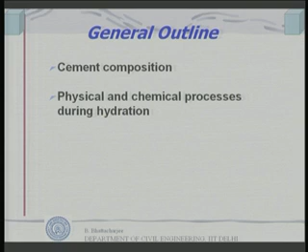The general outline of today's talk would be: first we will look into general cement composition, then the physical and chemical processes involved in hydration, then what is known as setting, and then the structure of hydrated cement.

Let us look at cement composition. We mentioned earlier that cement is produced by burning calcium carbonate found in limestone or chalk, and silica, alumina and iron oxide found in clay or shale at about 1400 degrees centigrade. So we burn limestone with clay. This material sinters and partially fuses to form what is known as clinker. Clinker is cooled and ground to a fine powder, a little gypsum is added in the process, and this results in what is known as ordinary Portland cement, OPC in short.

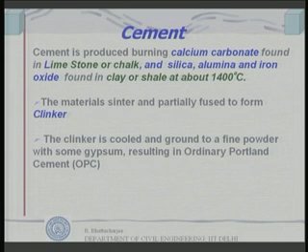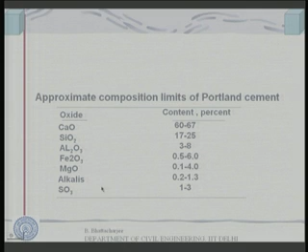Just for information, India is the second largest producer of cement after China at the moment. Now we can look into the oxide composition of the cement.

We burn limestone, and limestone is calcium carbonate. So when you burn limestone, the carbon dioxide is liberated, leaving calcium oxide. The clay or shale leaves silicon oxides, iron oxide, and aluminum oxides. So various oxides are left after burning and they form into solid solutions. Therefore cement is basically composed of various inorganic oxides.

Approximate composition limits of cement: calcium oxide in ordinary Portland cement is generally 60 to 67%, SiO2 around 17 to 25%, aluminum oxide 3 to 8%, and iron oxide 0.5 to 6%. Magnesium oxide is restricted to 0.1 to 4%. There will be sodium oxide and potassium oxide, the alkalis, at 0.2 to about 1.3%, and sulfur trioxide 1 to 3%. There is also something called loss on ignition, which is a measure of unburnt material that can burn and form into oxides. So this is the typical oxide composition in cement.

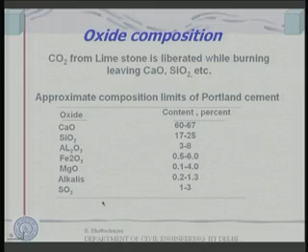One point before we go to the compound composition of cement: burning cement essentially generates carbon dioxide. So from an environmental concern, cement production generates carbon dioxide and consumes a lot of fossil fuel. There are two ways it generates carbon dioxide: first, the calcium carbonate in limestone generates carbon dioxide; second, since we burn fossil fuel to heat up to 1400 degrees centigrade, we further generate carbon dioxide. So from an environmental point of view, cement is not really a green material. Therefore cement should be used very judiciously. It is a material that gives us artificial stone, but it should be consumed as optimally as possible, to the least amount, because it generates so much carbon dioxide.

Now let us look at the compound composition. These oxides form into solid solutions, and these solid solution compounds are: tricalcium oxide with SiO2, called tricalcium silicate; dicalcium silicate; tricalcium aluminate; and tetracalcium aluminoferrite. So these are the main compounds of cement.

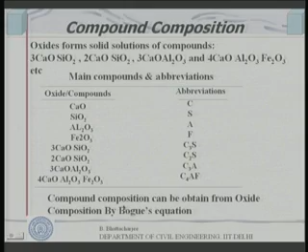This compound composition can be determined from oxide compositions using a formula known as the Bogue formula, or Bogue equation. So if you know the oxide composition, you can find out the composition of C3S, how much C2S, how much C3A, and how much C4AF. To remember these long names again: tricalcium silicate, dicalcium silicate, tricalcium aluminate, and tetracalcium aluminoferrite.

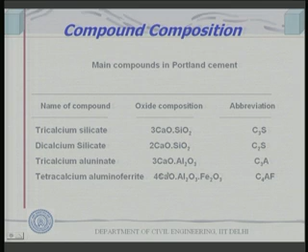This has been repeated so that it is clearly remembered, because that is the terminology one uses again and again in the context of concrete and cement.

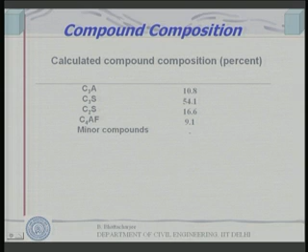Now, if I calculate the compound composition based on the Bogue's formula that we mentioned, we find that C3A comes out to be about 10.8%, C3S comes out to be 54.1, C2S comes out to be 16.6, and C4AF comes out to be 9.1%, assuming calcium oxide for OPC is 60 to 67%, which was shown earlier in one of those slides. So roughly, C3S is 54%, which is the maximum, C2S is about 17%, C4AF is 9%, and C3A is 11%. So one can calculate the oxide composition, and from the oxide composition one can calculate the compound composition.

Now, this reaction is exothermic, it generates heat, because as I mentioned earlier, you are actually producing cement. Cement is not a naturally made material, we are producing it at the expense of energy. We consume a lot of energy because we burn it up to about 1400 degrees centigrade, and therefore we lock up a lot of energy. This energy can dissipate by reacting with water. Chemical potential is raised, and this chemical potential comes back to a relatively stable state by reacting with water.

So the reaction is exothermic, it produces heat. If we see the relative heat produced by different compounds, C3S produces about 502 joules per gram. This should be joules per gram, not calorie per gram. C2S produces 260, C3A produces 867, and C4AF produces 419.

So this is the relative heat of hydration. C3A produces the maximum heat of hydration, generating maximum heat on reaction, whereas C2S generates the least, with others in between. We can presumably understand that C3A will react faster than anyone else, while C2S will react at a slower rate because it generates less energy. It's not an explosion that generates a lot of energy instantaneously; where heat of hydration is slow, the reaction is relatively slow too. So C3A reacts immediately, maybe the next to react is C4AF or C3S, and lastly C2S reacts. This takes a long time for the C2S reaction to be complete.

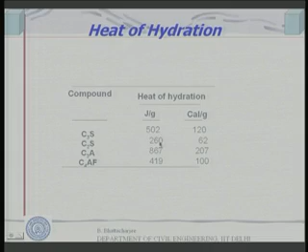So this is the heat of hydration of pure compounds.

If we do a schematic representation of the formation and hydration of Portland cement, this is what we should see. First, element-wise, we have oxygen, silicon, calcium, aluminum and iron as component elements. These combine to form oxides like calcium oxide, silicon oxide, aluminum oxide, and iron oxide, which is ferric oxide. Then these combine to form compounds: C3S, C2S, C3A and C4AF.

And when you add water to this, it forms what is known as CSH gel and lime, calcium hydroxide, slaked lime. We shall see this in more detail.

Now, these combinations can differ in different types of cements. The proportions of these compounds would vary, and by varying these proportions we can actually get different types of cements. We will discuss this in detail, because I can control the proportions of oxides. The oxide composition of the cement can be controlled relatively, from the raw material mixing etc., and thereby the compound composition of the cement can be controlled. We know the properties of each compound, like C3A possibly reacting before anything else because it has the highest heat of hydration. So if I want to increase or reduce the rate of heat of hydration, I will have to reduce the C3A component in the cement.

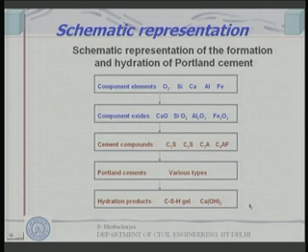So by manipulating the compound composition, I can get various types of cement, and I can add some additives too. So Portland cement plus various additives gives me various types of cement, and when added with water, it gives hydration products. One of the major compounds is calcium silicate hydrate gel, CSH gel, and it also produces lime to a certain extent. We shall see this in detail in the next few slides. So let us see what happens to cement when I add water.

Physically, what happens when we add water to cement? The mix will be in a plastic state - not liquid, not solid. A solid has a definite shape, a liquid flows on its own and attains the shape of the container. A plastic does not attain the shape of the container on its own, but you can make it do so by applying force, causing it to move or change shape. So when you add water to a powder like cement, it forms a plastic mix, and a uniform mix would be plastic. So addition of water makes it plastic and a workable paste, as we call it.

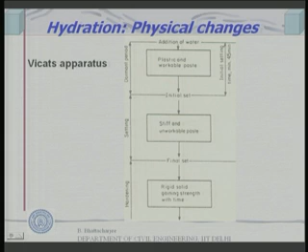This paste, because of the reaction taking place, tends to solidify - after all, the reaction consumes the water. This solidification process we call setting, so it sets to become a solid. The initial period we call the dormant period, when it goes from plastic state to solid state, and this should be a minimum of 45 minutes for ordinary Portland cement, as specified by most codes. So we call it initial setting - meaning from the plastic state it goes to a reasonably solid form, after which you can't deform it further without compromising properties like strength. If you try to give it a new shape after this time, there will be some loss of its properties.

So you add water, the mix is plastic and workable, you can apply force and get it into the right kind of shape, and then it initially sets. This time should be a minimum of 45 minutes, and we call this the dormant period.

Now, how do we measure this? The basic ideas of physics and chemistry were not available in earlier days when this was started, so a specific apparatus was designed called the Vicat apparatus, which has a mold where you prepare a standard paste. The standard paste is prepared with a standard amount of water, which we call standard consistency - again determined by the same apparatus, whereby you prepare a paste and allow a needle, a 10 millimeter diameter needle, to penetrate through it. When the penetration reaches a specific level, we say it has standard consistency.

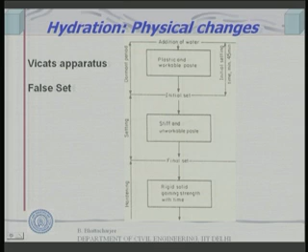At the moment, I'd like to mention something called false set and flash set. False set happens when you have added too much gypsum into the system - if the gypsum quickly reacts with water forming a solid, as if it has solidified, that is called false set. You can remix it again and get the right kind of setting.

So that is the dormant period and initial set, but after that it actually solidifies further, taking about 10 hours maximum, by which it should become fully solid - but it still does not gain strength, it is not hard enough. If you try to pull or push it, it would actually break. So after setting comes hardening. Hardening means gaining strength, while setting means going from a plastic state to a solid state. In initial setting, it is in a dormant period, and then it becomes stiffened and a non-workable paste - you can't work on it after the initial set. It sets further, becomes fully solid, such that if you open up the side mold, it will not collapse.

It has got its definite shape, and if you expose its side faces of the concrete or cement paste, it will no longer collapse. So it has become stiff enough. That is called final setting, and beyond that it becomes a rigid solid, it goes on gaining strength, and that process we call hardening.

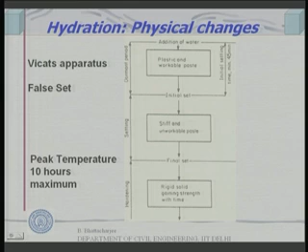Final set also corresponds to the time at which peak temperature is attained, because heat of hydration is produced simultaneously, and peak temperature is attained during that period of time. So that is what is initial and final setting time.

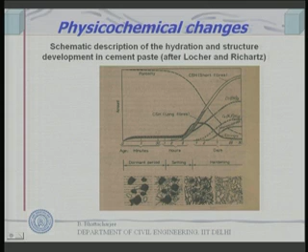The first product to form, because C3A is the most reactive of all the materials, will react quickly with water unless it is controlled, and it will give you an impression of what is called flash set. That means C3A reacts and stops, inhibiting the reaction of all other material - that is called flash set.

So in order to control this setting process, we add some amount of gypsum. Gypsum is calcium sulphate, and this calcium sulphate has high affinity for C3A, tricalcium aluminate. Tricalcium aluminate and gypsum react, forming calcium sulfoaluminates. The name of this compound is called ettringite.

So that is the first thing that forms during the dormant period, and you can see the dormant period here. The cement particles are as if floated in water, and during the dormant period some reaction takes place and a sort of fiber-like growth takes place.

This is the phase where setting is taking place, and these fibers grow. The solids - the water filled spaces here, outside the solid - tend to become filled in with fiber-like materials, and this water reacts. So the volume occupied by water now gets filled in by solids, and gradually more and more solids are formed.

In the very long run you will have a structure like this, which will have a large amount of solids with some pores which were originally occupied by water, and some other special pores - we will come to this in detail. So this is how the physical changes take place.

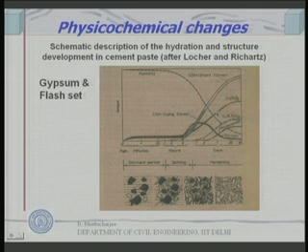And you can see the porosity goes on reducing, because the original pore space was water-filled space, so there were fewer solids and therefore a lot of interstitial pores between the cement particles. This decreases because the water-filled space is now occupied by solid products of hydration. So this increases while the pore space reduces.

So we can go to the next slide to look into the reaction process. The main chemical reaction, C3S reacts with water. In cement chemistry, we abbreviate water as H. Calcium hydroxide therefore is abbreviated as calcium oxide and H2O, that is CH. So CH stands for calcium hydroxide.

So when C3S, this is one of the major reactions, C3S reacts with water, it forms CSH gel, which is a gelatinous structure, the fibers that we have seen, and some amount of lime is produced.

In fact, 100 grams of C3S reacts with approximately 23 or 24 grams of water, forming about 75 grams of CSH gel, calcium silicate hydrate, and 49 grams of calcium hydroxide, slaked lime, which is the same compound, same composition as slaked lime. So the lime is formed.

If you see the C2S reaction, C2S reacts with a similar amount, although not exactly the same, we shall discuss this again. 100 grams reacts with 21 grams, producing less amount of lime, but both produce CSH gel, whereas tricalcium aluminate does not produce the same CSH gel, but produces calcium aluminate hydrates. It has got different stages, initially C4AH is one product, there are other products formed. Anyway, we need not look into those details, but that is the main reaction of cement with water and its products.

If we look at it, the strength giving compounds are shown here, this is age in days, and this is compressive strength given in megapascal. C3S shows very high early strength; in the initial ages C3S reacts and it has got CSH gel which has got the bonding property. Basically, when cement reacts with water, it forms this gelatinous structure which has got enormous surface area.

Very large surface area, possibly 1000 times more than that of the cement itself, and the surface forces start dominating, van der Waals kind of forces and bonds are established between the material there and the CSH gels. So CSH gels are the ones which have got very large surface area, and can bond inert material such as stones or sand, and that is how it gives the cementing property.

Lime, on the other hand, is a non-sealing precipitate; it is sparingly soluble, it does not go into solution so easily. So it goes partially into solution, sparingly soluble, and it remains as a non-sealing precipitate in the pore structure of the cement paste, in the unoccupied space of the cement paste.

So CSH gel is the main strength giving compound in cement, and we know C3S produces high CSH in the beginning, therefore it gives you the early strength. So it is C3S which gives me early strength, but later on, as the age increases, you can see this strength does not increase much, it nearly becomes flat.

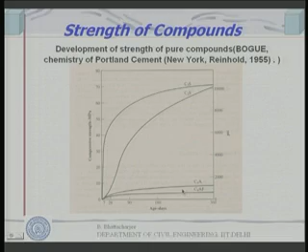C3A contributes very little to the strength of the cement paste, and C4AF contributes still less, but it is a concern because it gives a lot of heat of hydration, and we will also see that this reacts with sulphate.

So in a hardened state, C3A if it reacts with sulphate forms ettringite which occupies more volume, and can be a durability problem. We will discuss this in more detail later on. So this is the strength contribution - C2S and C3S are the main strength giving compounds.

So cement paste always consists of some unhydrated material, unless it is fully hydrated which takes very long time, and it would also depend upon how much water you have added with respect to the cement, in other words with respect to water cement ratio.

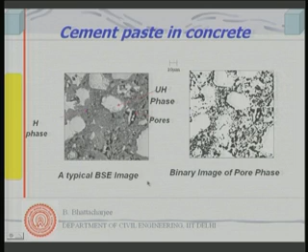So that is what cement paste looks like. Now people have tried to model this through various types of analytical experiments. People found the structure of the CSH - it is like a fiber-like gelatinous structure - and that has been established as early as the 1950s by various people who studied it through scanning electron microscopy in those days.

Also, people have studied through nitrogen adsorption techniques the thickness of interstitial layers, the gap between interstitial layers and so on, and they found that it has got a gelatinous structure.

One of the models proposed, say by Ishai, is something like this. He feels there is a layer structure, and between the layers there is some space where you will have what he calls gel water, because it has got a gelatinous structure. So between the layer structure you will have gelatinous gel water, and gel pores exist between the layers.

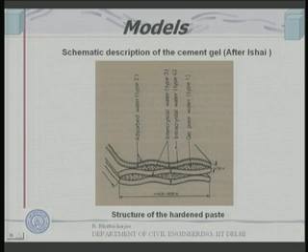Then there are intercrystal water, different types, and also adsorbed at the layer surface there is adsorbed water, and this water does not have density equal to 1 - they are different, in fact they have different densities. So you have gel water, adsorbed water, or intercrystal water - that is the model Ishai gave.

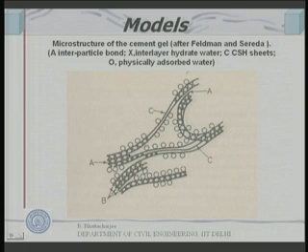Similar models were given by other people, like this one given by Feldman and Sereda, who defines interparticle bonds between different particles, then interlayer hydrated water defined by X, and then CSH sheets. So C stands for CSH sheets, O are the physically adsorbed water, and X represents the interlayer hydrated water between the layers. So this is another model.

So what do we understand from this? Well, they are a layered structure, they have a gelatinous structure - the hydrates, solid products of hydration. They have gelatinous structures, CSH gel, and layered structure, and between these layers there will be some amount of water - chemically combined water, physically adsorbed water, and gel water between the layers. There are pores between these layers which we call gel pores.

Initially you have cement and water, and this water-filled space, some of it will get occupied by the hydrates. After the hydration reaction, the hydration product will occupy some of it, but some space will remain vacant and the water will evaporate from them, depending upon how much water you have added.

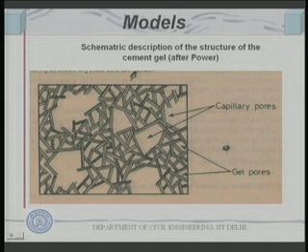So what we see is pores in cement are of two types: gel pores, which are actually micropores, with sizes ranging from 0.5 nanometer to about 100 nanometer. Then there are capillary pores, which I can call mesopores, with sizes ranging from 5 nanometer to 5000 nanometer. We shall see later that these gel pores are responsible for shrinkage and creep of concrete, whereas the capillary pores, which are larger in size, are responsible for mechanical and durability properties of concrete. So these are the sizes of the two types of pores we have seen.

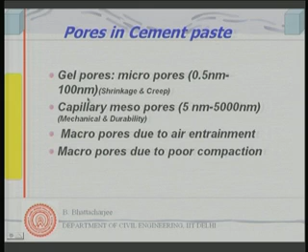In addition to this, if I add some air entraining agent, some admixtures as I mentioned earlier, they can lead to something called macropores due to air entrainment. We will not discuss this at the moment. Also, if you do not do compaction properly, there can be some large macropores due to poor compaction. But the first two are definitely inherent to hydraulic cement binder paste or concrete system.

Now let us look at this pore a little bit in more detail. I can find out how much water will remain chemically bound to various compounds of cement. People have done very long term experiments, something like 12-13 years, and found that 1 gram of C3S consumes 0.23 grams of water. C2S, 1 gram consumes 0.196 gram of water, although roughly we take it as 23 or 24 for everything. Earlier one of the reactions I showed 24, but this was observed, and C3A consumes about 0.522 of water.

C4AF on the other hand consumes about 0.109 grams of water. So, 1 gram of C3S consumes 0.23 grams of water, 1 gram of C2S consumes 0.196 gram of water, 1 gram of C3A consumes 0.522 grams of water, and 1 gram of C4AF consumes 0.109 gram of water.

I also know what percentages of these compounds are present in ordinary Portland cement: C3S is about 54%, C2S is about 17%, C3A is about 11%, C4AF is about 9%. So I can find out how many grams of water 1 gram of cement will consume - a simple calculation, using the law of mixtures, nothing else. Based on that, we can show that 100 grams of cement needs about 23 grams of water.

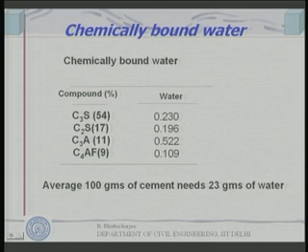This has been accepted by various experts, and it is generally accepted by concrete technologists that 100 grams of cement needs 23 grams of water. There can be some variation here and there, since the percentages of C2S, C3S can vary slightly, even within OPC there is some percentage variation. This is based on one experiment done. So now, on average, we take it for granted that 100 grams of cement needs about 23 grams of water for complete hydration over a very long period of time.

So, you can look into those pores in more detail. Now, we define something called degree of hydration. What is degree of hydration? Because this reaction is not instantaneous and it takes very long time.

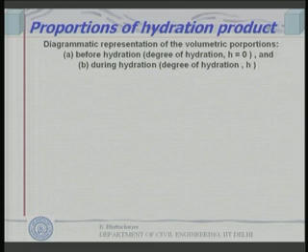If all compounds of cement react with water completely and form hydration product, then we say the degree of hydration is 1. If it is less, say 100 grams of cement I take, and let us say all 100 grams have reacted with water, then degree of hydration is 1. If only 50 grams have reacted and 50 has not reacted, then degree of hydration is 0.5. So, it is the ratio of the mass of the cement that has reacted to the original mass of the cement, that we call degree of hydration.

So, before hydration, degree of hydration is 0, and during hydration, degree of hydration is H. Let us look into a schematic diagram: initially I had cement and water, with a volume VW, volume of water, and VC, volume of cement. Then after hydration, what will happen?

I will have some unhydrated cement, as we have seen from the BSE images. You will have some solid product of hydration, and this is associated with some amount of porosity, gel porosity. This is inherent, and these pores are occupied by water, which we call gel water.

In addition, we will have some amount of originally water filled space which will remain vacant or be filled by water, which we call capillary water, not filled by solid. But there is also some amount of space which will remain empty capillary. Why? Because if you compare the volume occupied by the water and cement originally and the volume occupied by the solid product of hydration after reaction, we find there is a slight reduction in volume. This occupies slightly less volume than the volume of water and cement consumed in producing it, so there is always some empty capillary formation while cement reacts with water.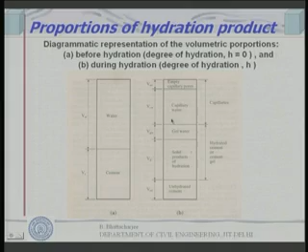So schematically, cement and water react to form some unhydrated cement, some solid products of hydration, some space occupied by gel water, some occupied by capillary water, and some empty capillaries. This total constitutes the capillaries, and this total constitutes the hydrated product of cement, or cement gel, the total hydration products. This is inherent to it; whenever this is there, this will be there because of the gelatinous structure, which has interstitial pores occupied by water.

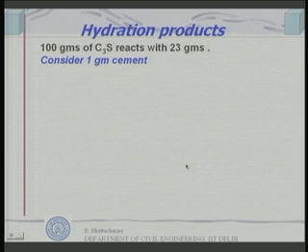We can do a little calculation to find out the possible volumes of these products of hydration. We said 100 grams of cement reacts with 23 grams of water. Now, let us consider 1 gram of cement.

Density of solid hydration products has been experimentally found to be 2.43 to 2.59 grams per cc, in CGS units. So one can assume average density is about 2.51 grams per cc. Density of cement in CGS system is 3.15 grams per cc, density of water is 1 gram per cc. So you have 3.15 grams and 1 gram combined in certain proportion; 100 grams reacts with 23 grams, resulting in a product which has got 2.5 grams per cc density of solid.

So 1.23 grams, because 0.23 grams reacts with 1 gram of cement. So if I consider 1 gram of cement, 1.23 grams of product of cement hydration would occupy 0.49 cc, because 1.23 divided by 2.51 is 0.49 cc.

1 divided by 3.15 - that is the volume occupied by the cement originally, plus this was the volume occupied by water because the density is 1 gram per cc. That will result in 0.55 cc, and this is 0.49 cc. So this difference - this 0.49 cc - is the volume occupied by the solid product of hydration.

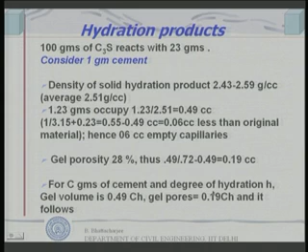I can find out the total porosity by subtracting the original volume minus the volume of unhydrated product minus the volume of gel, volume of gel pores. What is the volume of capillary porosity? What is the volume of capillary pores?

Divided by the original volume results in capillary porosity, and the expression for capillary porosity is something like this, W by C - you can derive this easily, it is not a difficult task, because the original volume is known, the volume of the solid gel is known, the volume of the gel pores is known, the volume of unhydrated cement is known for a given degree of hydration. So we can find out the rest of the volume, since the original volume minus the volume of gel pores, volume of gel solid, volume of unhydrated cement will give me the volume of the capillary pores.

So I can find out the capillary porosity. Pc denotes capillary porosity and it is given by W by C minus 0.36 H, where H is the degree of hydration. This is related to the volume occupied by original cement and water, 1 divided by 3.15 is 0.317, and W by C is the water to cement ratio. Similarly, gel porosity is given by the formula 0.19 H divided by this, and total porosity is the sum of Pc plus Pg, which gives you 0.36 minus 0.19. So it gives you W by C minus 0.17 H divided by 0.317 plus W by C. So this is capillary porosity, this is the expression for gel porosity, and this is the expression for total porosity.

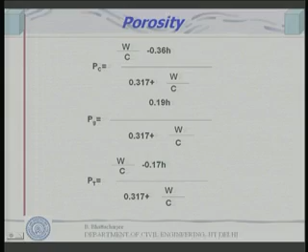So if I put this equal to 0, this term has to be 0, and from this you can find out what is the H max. If you have water cement ratio less than 0.36, it follows that you can never have full degree of hydration; some unhydrated cement will remain.

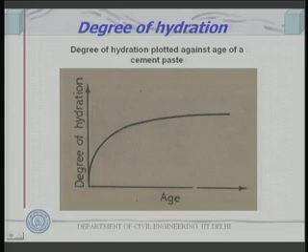Degree of hydration changes with age, as we have defined. As age increases, degree of hydration increases, fraction of cement reacting increases. But in some cases, if the water cement ratio is less than 0.36, you can't get complete degree of hydration.

In fact, the H max will be given by W/C divided by 0.36. For example, if the water cement ratio is 0.3, maximum degree of hydration attainable is 0.3 divided by 0.36.

But this is no problem anyway, because unhydrated cement, if present in the system, does not cause harm to the concrete or cement paste, since strength of such a system is not necessarily governed by the volume of hydration product. On the contrary, it is governed by the negative aspect, that is the pores, because pores are the essential flaws in such a system.

If you have pores, they bring down the strength. So if you reduce the capillary porosity, strength would still increase irrespective of whether you have unhydrated cement in the system or not. Unhydrated cement will act like an inert, very fine particle, bonded by the other hydrated particles. So you will have a very sound particulate system bonded together with very little pores.